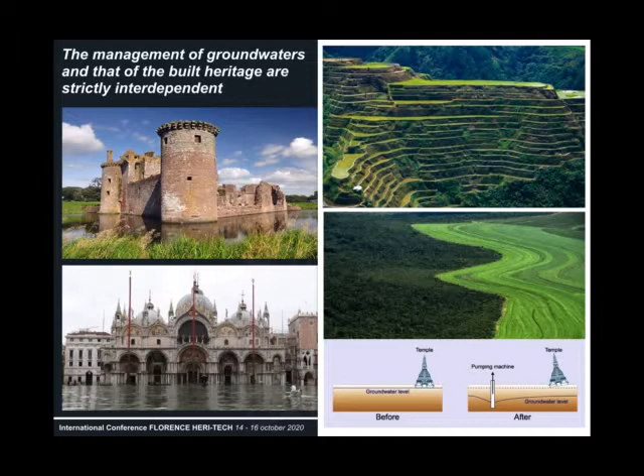The accurate knowledge of the subsoil, especially in highly anthropized areas, is claiming an increasing attention to understand the damages of the built heritage and to properly define conservation strategies. Accordingly, in recent years, architectural and archaeological conservation studies have undergone an interdisciplinary and multi-scale approach to this matter.

During the last decades, Egypt experienced a strong increase of stone monuments damage due to the groundwater rising, strictly related with the abrupt growth of population and a huge urban drift. These phenomena fully pose the country in the problem of very critical conservation tasks.

The problem is widespread, especially in Cairo, where the conservation of historical buildings is a matter even more complex, which is influenced by several key factors such as the cultural context, the urban and anthropic activities, the intrinsic features of a vast and heterogeneous architectural heritage, and the environmental conditions.

Here, we report the preliminary results of a multidisciplinary investigation carried out on the medieval monuments of Cairo by an Italian-Egyptian team. The aims are the study of the state of conservation of building materials and the dynamics of their deterioration, the study of the relation between material decay and anthropic activities, climatic factors, and pollution levels, and the last goal is to identify and systematize the vulnerability levels of the monuments to delineate adequate programs of control, management, and intervention.

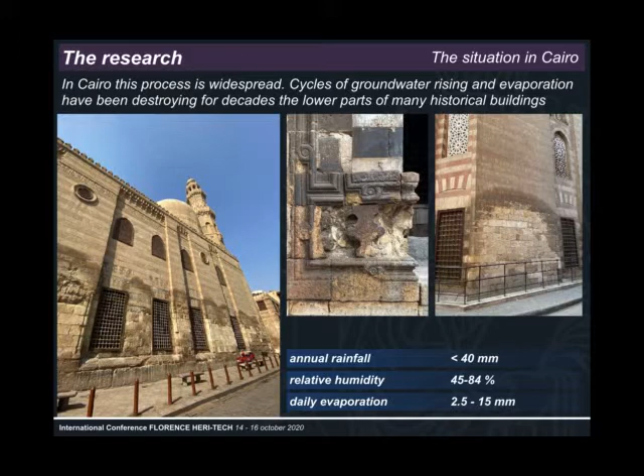A wide range of total dissolved solids, as well as intense contamination levels by nitrates and sulfates, have been described in relation to anthropic activities or wastewater management. Recent studies claimed a role by abandoned reservoirs or pipelines as concentration steps in the groundwater circulation, with adverse effects on the adjacent buildings.

The variety of materials of the wide architectural heritage in Cairo has led to limiting the first phases of this study to the masonry materials, with special attention to the limestone blocks. Excluding the stone blocks reused from southern archaeological areas, almost all limestone used in the historic buildings of Cairo since pre-dynastic times comes from the Mokattam formation, which mainly outcrops on Gebel Mokattam and from Giza Plateau to the hills in East Cairo.

The most valuable material, compact and hard, came from the ancient quarries of Tura Mazar, and a less compact limestone from shallow marine waters was carried from the outcrops of the Giza Plateau. A successive formation, the Ma'adi unit, gives a marly porous limestone. Nowadays, active quarries are located at Helwan, which also provide materials for restoration works in the region.

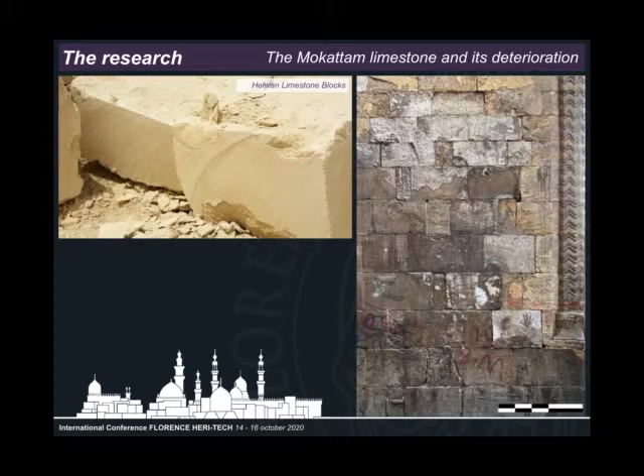The overall set of building materials associated to the definition of Mokattam stone emerges from this brief survey, characterized by a relevant variability in composition and texture. The different textural characteristics of the Mokattam limestone from the various quarried outcrops are thus linked to different decay processes and levels. Numerous studies carried out on stones were aimed to assess the main alteration processes.

These processes include dissolution due to the karst processes and acid processes, where atmospheric moisture, acidified with sulfur and nitrogen oxides, reacts with calcium carbonate, forming calcium sulfate. The same oxides are responsible for the formation of gypsum crusts on the stone surface, combined with dry deposition.

The stronger thermal variation leads to internal stress, mainly along the grain boundaries. As a consequence, the stone undergoes granular disintegration with increasing porosity. The presence of moisture on and in the stones and the salt crystallization inside the pore network may represent a significant environmental factor contributing to stone decay.

Initially, we identified the area for the on-field survey in the boundaries of the medieval town. The survey, planned on the basis of the previously available information, was aimed to assess a general level of decay of the buildings and the peculiar damage caused by water rising.

The investigation focused on three main districts of the old town: El Gamaleya, El Darb El Ahmar, and Al Karafa, the historical cemetery town at the foot of the Mokattam Hills. We selected 20 historical buildings as case studies scattered in the eastern districts of Old Cairo: mosques, khankas, palaces, houses, walls, and a portion of the medieval aqueduct.

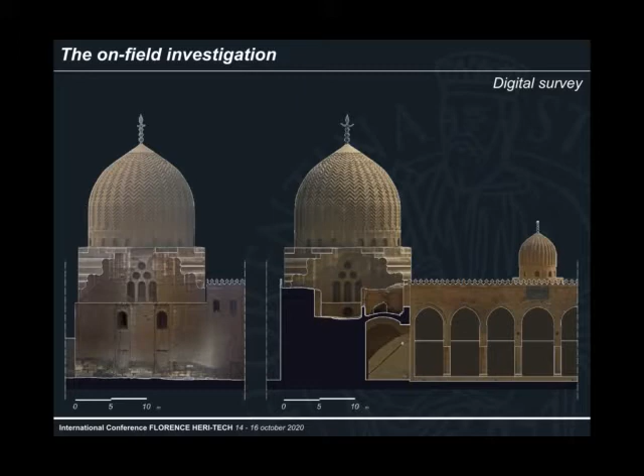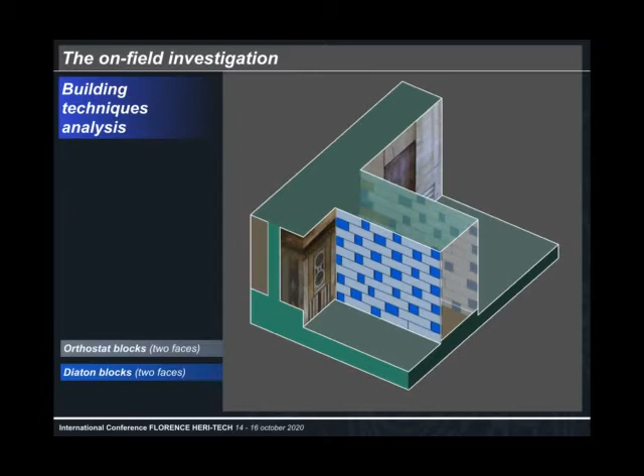For all the surveyed buildings, a field form was compiled, with observations on the architectural and technological aspects, the urban contextualization, the building materials, and the conservation tasks. A digital survey of selected parts of the buildings was carried out to understand their morphology and to create a support for further mappings. The architectural survey allowed us to document the technological details of the masonry.

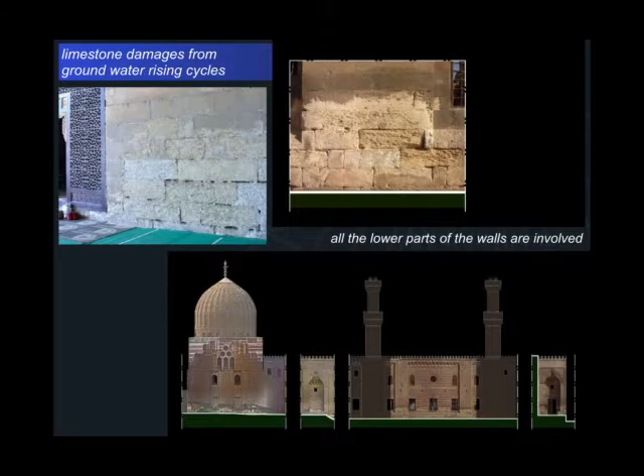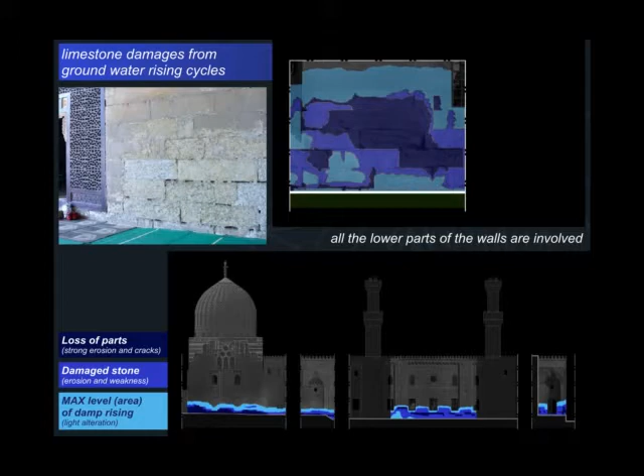Digital mapping of selected walls was then carried out with special attention to the qualitative determination of the erosive processes involving the limestones as a function of the appreciable water risings. From the comparison with the available photographic documentation of the same sites in the last decades, a rough estimate of the incremental step in decay was assessed. Other damage processes of stone were also mapped for the structures involved in the water rising, such as pavings, to give a more complete frame of the current state of conservation.

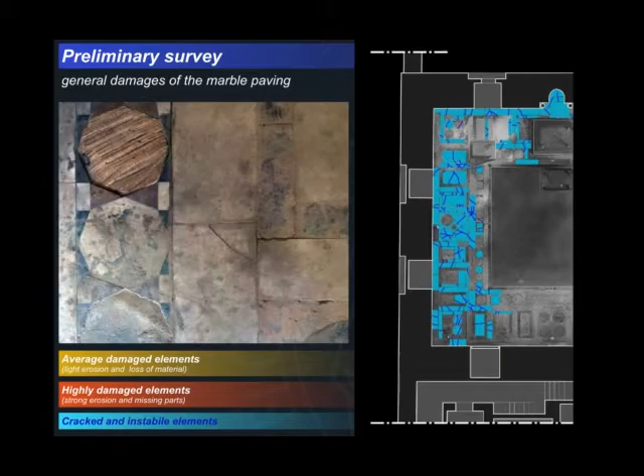All the investigated monuments present relevant levels of decay of the limestone in their lower parts. This is the case, for example, of the medieval aqueduct, the Al-Hakim Mosque, and the northern walls. The same critical conditions can be found in some of the most important monuments of the medieval city, such as the Great Mosque of Sultan Hassan and the main Barquq Mosque.

Several forms of decay were detected for the Mokattam limestone blocks, due to a number of chemical and physical phenomena, such as deposits, crusts, honeycomb, and abrasive weathering. Generally, limestone appears largely affected by erosive phenomena, mainly correlated to crystallization of soluble salts. Widespread sulfation phenomena of carbonate surfaces are observed and black crusts can be evidenced. In general, these dark black sulfated surfaces are located immediately above the level of the main detached area and thus are somehow connected to the water rising too.

The continuous erosion and detachment of the altered stone led fresh surfaces to be exposed and the process to be renewed. Accordingly, the overall degradation of the walls proceeds at a very high speed, and it seems confirmed by the constant presence of white microcrystalline particulate at the ground of the degraded walls.

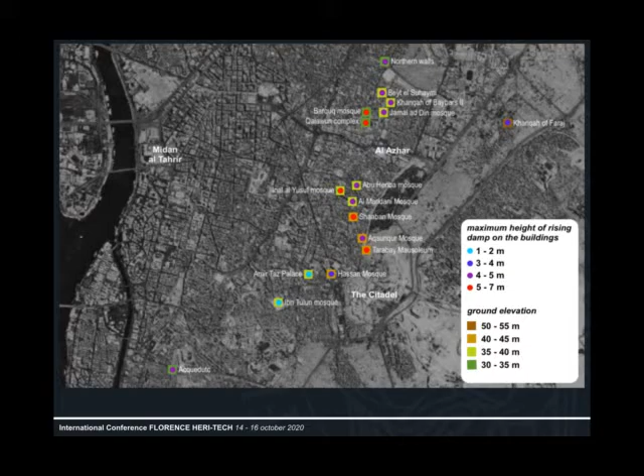Exemplar cases are the mosques of the main street in El Gamaleya, where the rising fronts are more than 6 meters high. Here you can see the Inal al Yusufi Mosque and the eastern wall of the Al Saif al-Din Barquq Mosque in Al Muizz Street. The evident damaged surfaces mainly concern calcareous stones, with specificities arising from water fluxes, composition and evaporation characteristics.

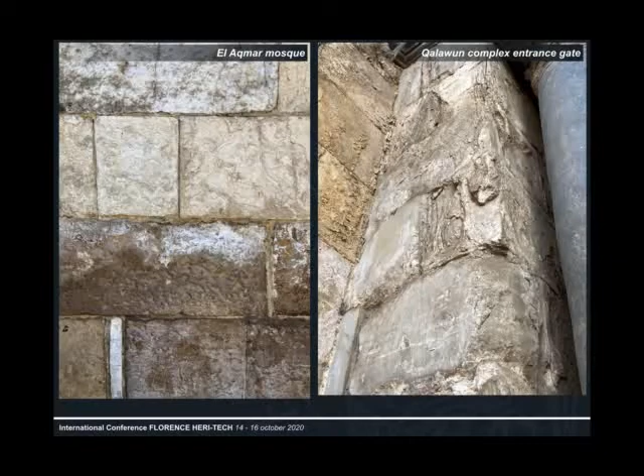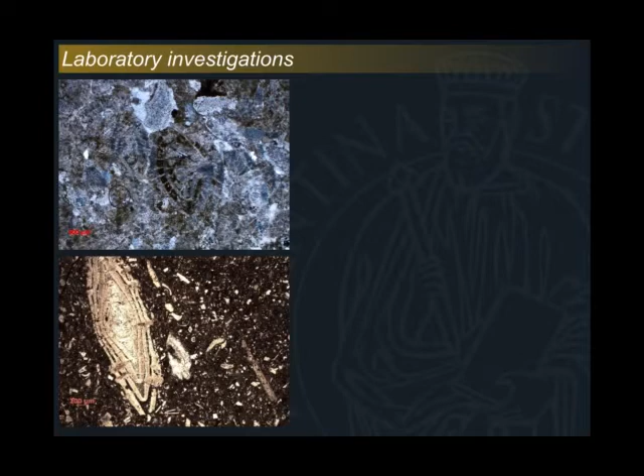Rock samples were analyzed, collected from Al-Maridani Mosque, Al-Aqsunqur Mosque, Qalawun Complex, and from the Khanqah of Faraj ibn Barquq. The mineralogical and petrographic analyses were carried out using X-ray diffraction and a polarizing microscope. The composition of the studied rocks consists of prevailing calcite with a small amount of quartz.

Various other mineral phases are observed, such as halite, nitratite, and calcium sulfate minerals. The porosity is low, with pores displaying irregular shape. Remains of microfossils are very abundant, and concerning the rock composition, the present results are in good agreement with the previous studies of the different formations belonging to the so-called Mokattam stone.

In particular, we confirm the frequent association in very small amounts of halite and gypsum attributed to a paleoevaporitic process. The same mineralogic phases can be also referred to alteration products of the Mokattam stone surface. That's why, accordingly, we safely attribute the identified phases of the alteration products in complete agreement with the visual inspection of the sampled wall surfaces.

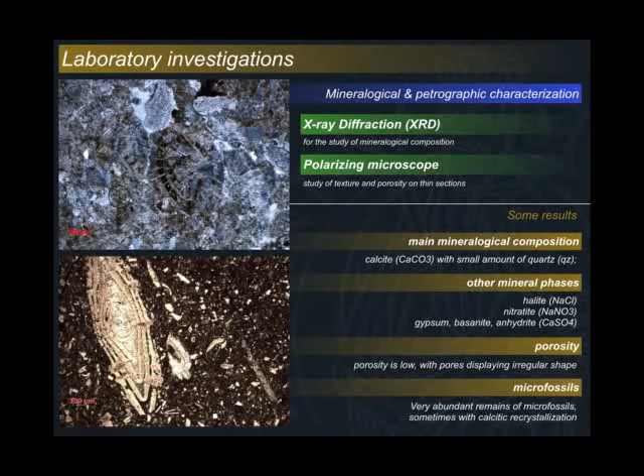Concerning the degradation of the stone, the most relevant question to be addressed is the active mechanism of alteration, namely, if the chemical species necessary to allow the accumulation of both chlorides and sulfates in the alteration products are provided by the water uprising or by atmospheric pollution. It is generally accepted that the urban atmosphere in Cairo can be rich enough in sulfate species and also sodium chloride, transported both from the nearby desert regions and from the seas.

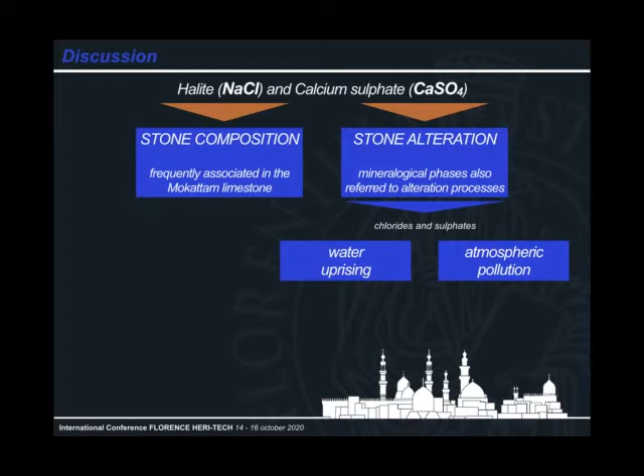The main weathering process is strongly related to the rising of the water table, which provides not only the wet environment able to catalyze the rock alteration and detachment, but also the majority of the salts necessary to the development of alteration processes.

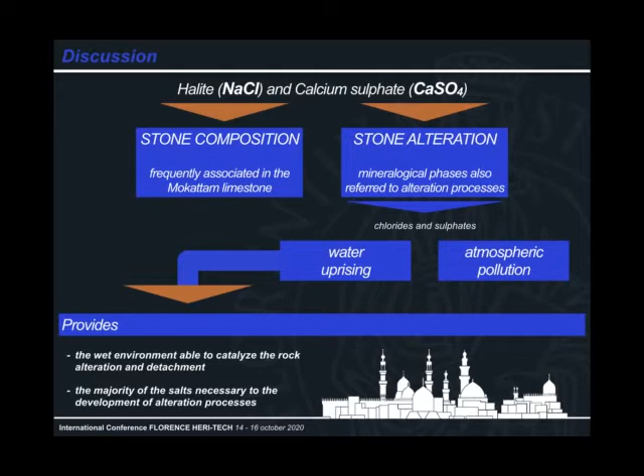The studies of the last decades have revealed how the weathering of the stone walls in almost all the historical monuments follows an almost reproducible pattern, where at least 4 zones are discriminated. From bottom to top, zone number 1 is heavily weathered with stone detachment. Zone number 2 is weathered with mainly halite as alteration product. Zone number 3 is weathered with mainly gypsum and sulfates as alteration product. And zone number 4 is the unweathered zone with the original surface.

On the one hand, our results are in line with and confirm these observations. On the other hand, the stratified alteration of the stone walls suggests that the clue of the weathering processes has to be identified in the rising up of the water table. This weathering process, besides providing a loss of aesthetic effects due to the surface alteration of the blocks, appears a more fundamental threat to the stability of the wall stone structure.

The stone, in fact, is exposed to weathering simultaneously at the surface and in its interior, with a progressive loss of physical coherence and mechanical properties. Accordingly, we envisage the most serious risk to the conservation of the medieval buildings in Cairo in the rising up of the water table.